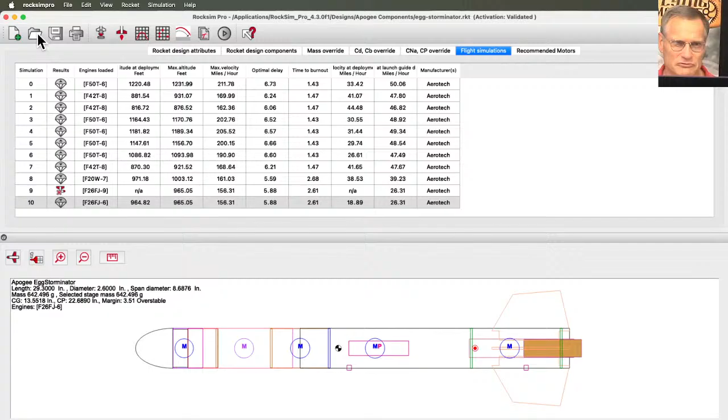I think I actually even tried, a few weeks ago, to create a glider. Let's see if I can find it. It's actually on my other computer. This is not my normal computer, this is the one I borrow to do RockSim. Let's see.

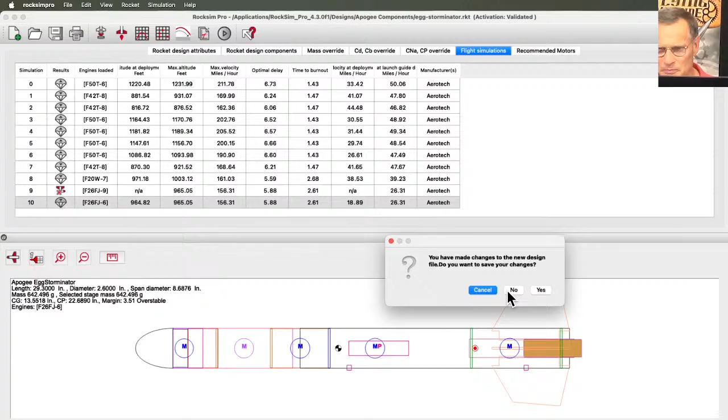Dynastar. Are you seeing my computer? Dynastar Snarky. Snarky has things that look like wings. So let's look at it in 3D right here. This is what it looks like, and it looks like it has wings. So does it have the potential to glide? That's the question.

Okay, so Curtis Howe, let me go to his question here. He says, I downsized the dark matter probe using the scale function. Not all the parts match up exactly to the small sizes. Is there a way to adjust standard sizes other than part by part?

And then Mark Sell's follow-up question is, does this apply to the gliding parachute you sell? And I can definitely tell you, Mark, on the gliding parachute, no, it doesn't. Definitely doesn't. Because in RockSim, as soon as the parachute comes out, it just follows the wind, and simulating a gliding parachute is beyond my knowledge.

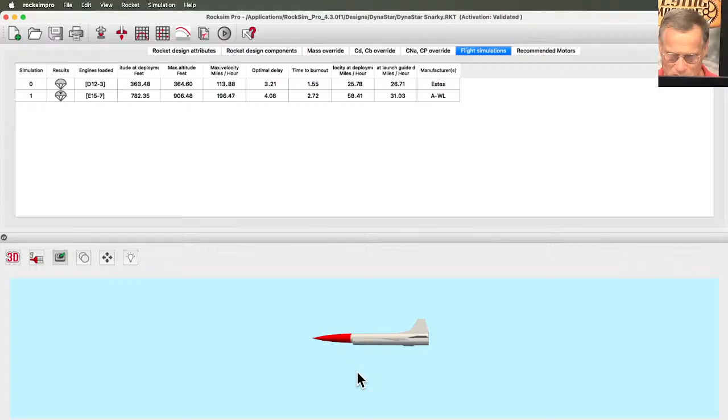I'll answer Curtis Howe's question because I think that's going to be easier. So he downsized the dark matter probe. I can downsize this too. Right now its diameter is 2.2 inches, and let's say you wanted to downsize it to a BT60.

So first you got to get a calculator, and I don't have a calculator in my dock, so I need to find a calculator app. Okay, so a BT60 is 1.637 inches, and this one right here is 2.217. So it's 2.217 divided by... I think I should have gone the other way.

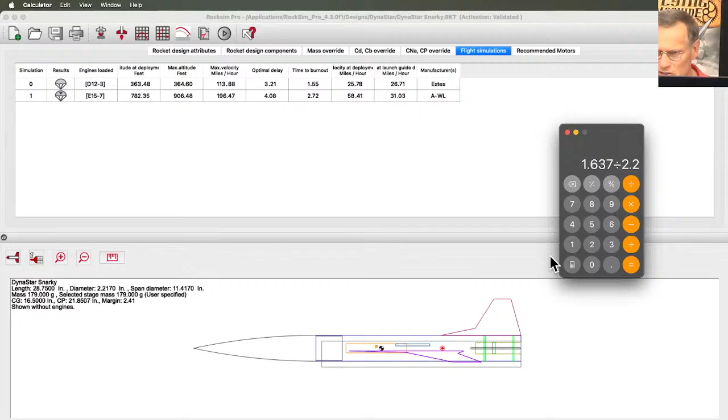I need to invert that, so it should be a smaller number. So: 1.637 divided by 2.217, looking at this number right here, equals... so we need to scale it down to 73.8%. I'm going to move this off to the side.

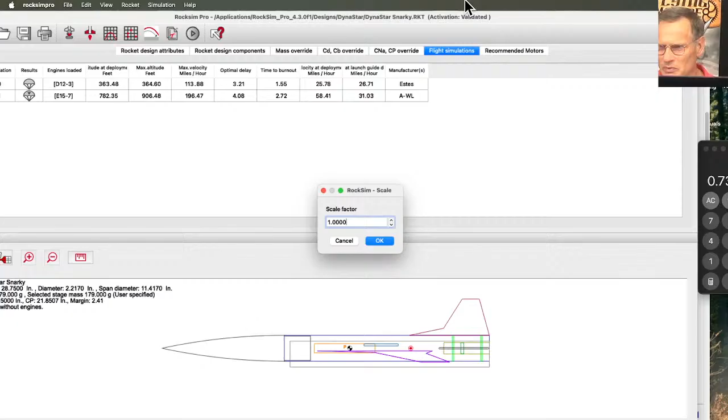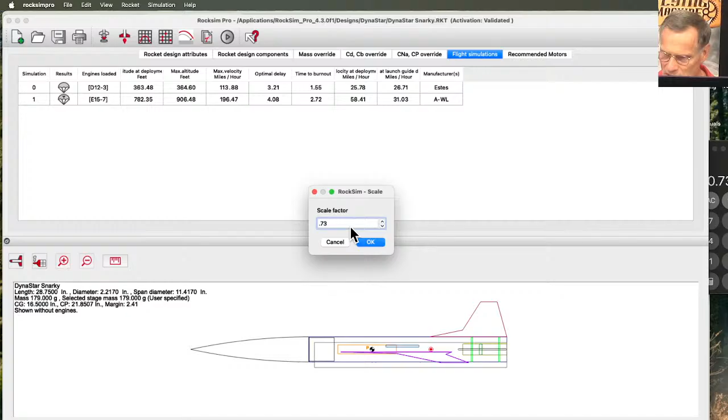So the scaling feature is: you go to Rocket, then Scale, and by Scale Factor, this is where it comes up. So I need to scale it to this number. Let's see what happens. Oh, it went away, I got to move that out of the way. Don't do that to me, come on. I have my screen resized and I didn't like it doing that. So: Rocket, Scale Factor, 0.7383521 — oh, it's only going to let me do that. Okay, so now it's scaled down to 1.63 inches, which is approximately a BT60. It looks the same, it's just everything's been scaled down.

Now the problem here, and this is what he's asking about, is: okay, so this is supposed to be a BT60 tube, but if we go and look at that tube, we go to Rocket Design Components, and it's highlighted so it'll be right here. If we open that up, now we got the correct outside diameter, but the inside diameter is wrong. So what should that inside diameter be?

So I'm going to go to the Apogee website, and I need an airframe tube, 41.6, and that is a BT60. It says Estes BT60 size. So if you look at the diameter, the inner diameter is 1.595 inches, where here the inside diameter is 1.6095. So it scaled down the outside correctly, but the inside also scaled it down, and it's not the same size on the inside as the outside, because a BT60's wall thickness would not be that thin — it's about the same as a BT70.

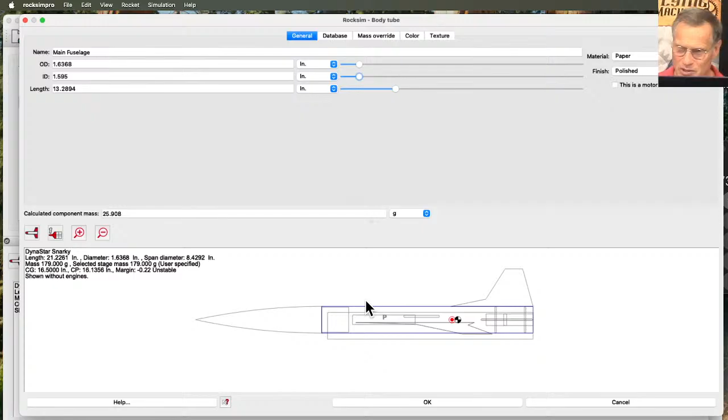So once you scale something down, you have to go through every part and say this has got to be 1.595 inches, and now it's truly a BT60. You have to do that for the nose cone. The worst is the tubes, because this one has an engine mount tube, centering rings - anything with two diameters won't scale down properly. Fins are usually okay, but launch lugs, centering rings, and couplers - you've got to go through them all one at a time.

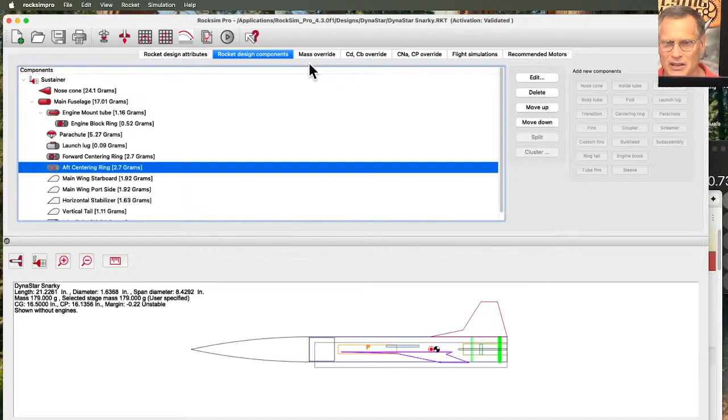Now the easy way to get around this is to just ignore all that, because really what we're interested in is the shape of the rocket and flying it. You can just quickly do a mass override at the end, and that accounts for all the differences between the two models.

Although once you scale things down, you don't know the weight until you actually build it. So you have to build it first and then scale it down. Yeah, that's the one problem with scaling.

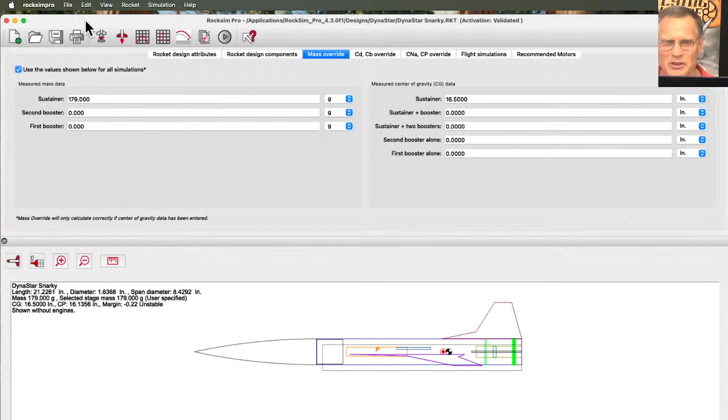Someday in the future, when AI is smart, this would be a task for AI. You scale it down and then tell the AI, okay, go find me the correct dimensions for all the parts on the Apogee website so that I can build my rocket easily. And that's how you do it.

So that answers that question from Curtis Howe. Alfred Indy says Michigan, hello - I think he's from Michigan, and he is saying hello.

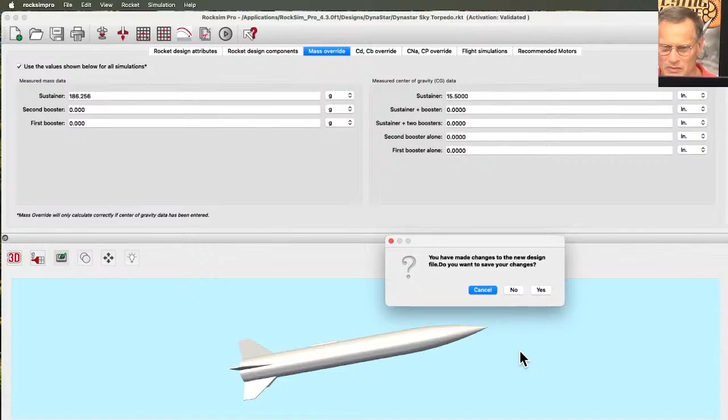Okay, so I just scaled that rocket down, so I need to reopen it. Let's see - Sky Torpedo, no, I'm going to reopen it. Snarky, open. No. Okay, so now we're back to the 2.217 inch diameter rocket.

Let's see if we can get it to somewhat glide. First, let's run a simulation. Let's just throw in a rocket motor, and I think I'll choose like a D12-5.

Okay, and flight events - let's say there's no event, so it's like a glider. The nose is going to stay on, the parachute's not going to come out. So if it doesn't glide, it's going to just come down like a rock.

Starting state, we're going to launch it almost straight up, and the launch guide azimuth - we're launching it towards the east. I'm just checking my settings here, my altitude. I do not know where that launch site is located, but that's okay.

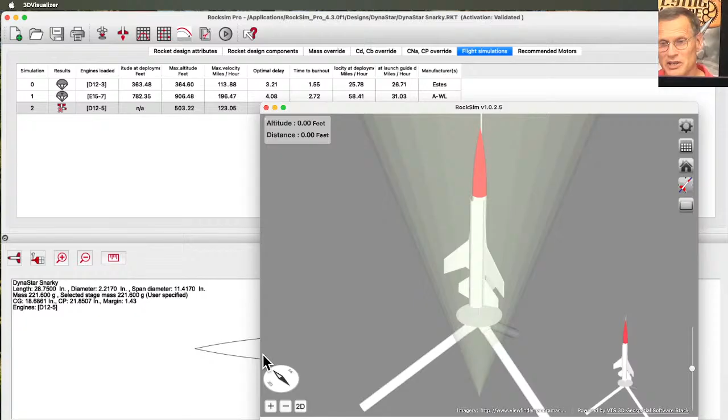Let's do the flight profile and click that button. We're going to get a RockSim Pro message, and you have to close it so that it will run the simulation. That's the downside of the free trial - you get ads, but that's all the ads you're going to see. You only get the ad one time whenever you run a simulation, so if you run a lot of simulations you'll see a lot of ads, but mostly just that one.

So this is what I was talking about in the launch visualizer. If you look at it, the background is gray. We can see the rocket sitting on the pad, and we can see the sky and the horizon, but I have no depth perception of where this rocket is.

But let me leave the weathercocking cone on - it's giving me a little bit of information. What I do know is this rocket's going to be in the air for 25 seconds. So let's take a look at it. It's going up, and it's in the weathercocking cone, so it's doing fine.

All right, so now it's kind of flopping around. Okay, see, I can call this gliding - it's upside down, but it's gliding. It's gliding backwards. And we're getting down close to the ground. Let's see if I can stop it right there.

Let's zoom out and get the lay of the land here. So we can see that trajectory, and it's not your typical trajectory. Let me turn off the weathercocking cone now, and let's turn off the smoke.

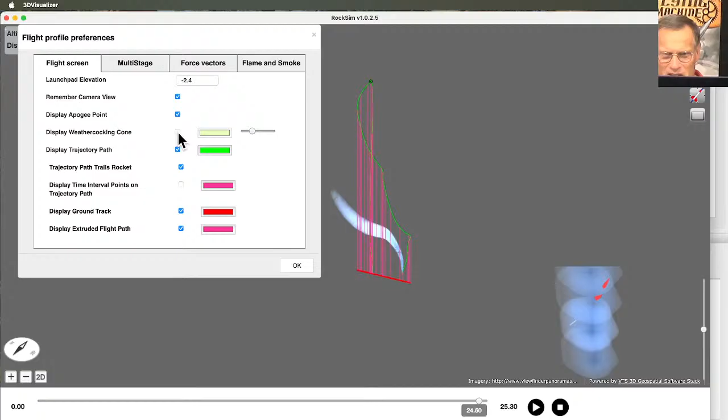Okay, and turned off the tracking smoke. So the rocket's going up, and now it's coming down. You can see its orientation here as it's coming down. It's not gliding the way we would like it to glide, but that is technically a glide.

Let's see if we can look at it from straight down. Looking at it straight down, can't tell much from that angle. But the liftoff point was right here. It went up and zoomed around, but it kind of just followed the trajectory down to the ground.

Okay, so now technically it is gliding. Let's see if we can get it gliding nose first. So let's put some nose weight in this rocket, because basically it's close. So this is going to be interesting. Let's see what happens.

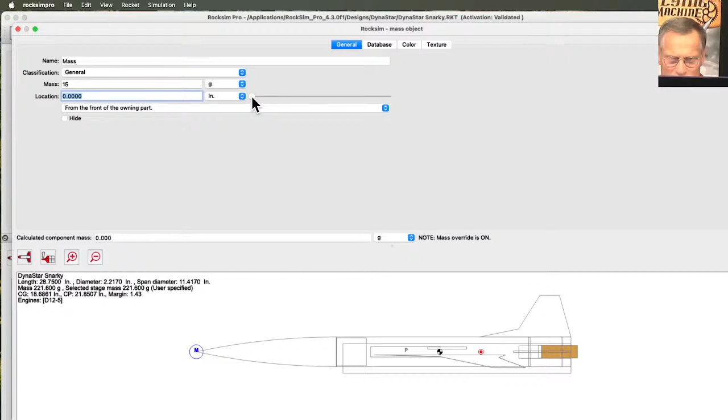So let's put some nose weight in there. I'm selecting the nose cone. I'm going to come over here to mass object. This is the database of all the mass objects, but I don't really care about anything, I just want some mass. Let's throw in 15 grams. And so right now that mass is right there. I'm just going to move it inside the rocket a little bit. And we'll call it good.

And now let's launch it again. So this is how you go ahead and design things. You make your first flight, see what it does, then you come back, make some changes, see what it does. So that's kind of what we're doing here. It's going to be in the air about the same amount of time.

Let's launch it. So it launches, it's going up. I can still see it's going up right here. Now it's starting to come back down. Okay, so now we're going down. And it's a better glide than before. Before it was different.

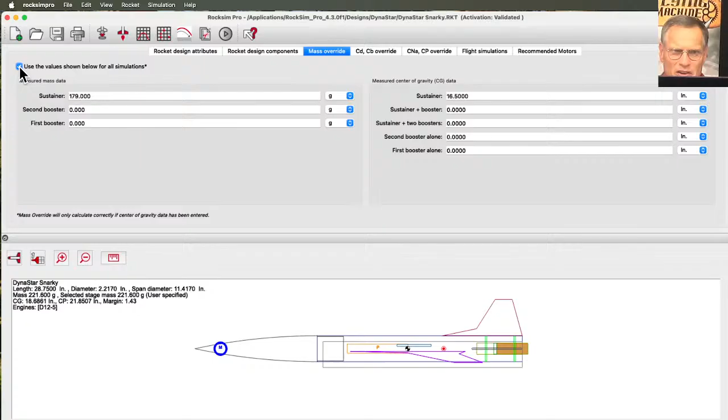Now, let's go back to the design components, take that mass and delete it. Basically, we have to start over because we had screwed up, because we had a fixed mass. I'm going to say yes. So we're going to launch it again. If you click on this one here, it'll explain this mass problem that we're talking about like right now.

Mark Sell writes, can you adjust the CG so that it is closer to the CP to help improve glide? And that is exactly what I'm trying to do right now, Mark, adjusting the CP and the CG. But it's not as easy as it seems.

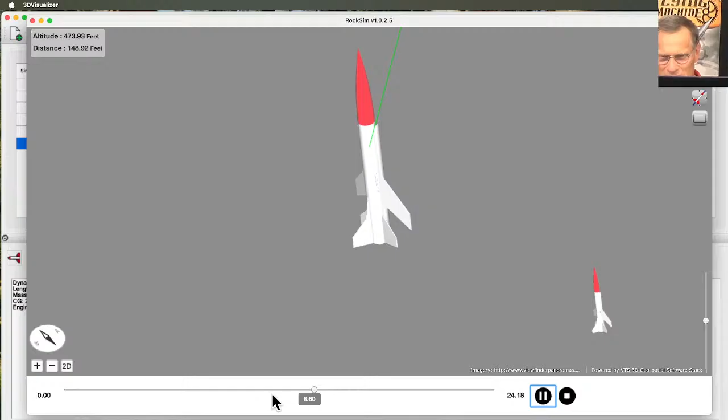Okay, so rocket is kind of doing what it did before. It's flopping around. It flipped over, almost wanted to flip over. It's kind of wobbling back and forth. And just about down. Okay, so let me zoom out, see what it looks like. Okay, so this one is definitely a longer glide.

Do you see that? So the liftoff point was right here. It went up, kind of flipped over, and then it was kind of backsliding right here. So now I can select, I know this one was different from this one. So if I select both of them and hit the flight profile button, we can compare two flights at the same time.

Okay, so right now there's two rockets right here. See, one just took off and went in a different direction. And I want to pause it when it gets down to here. And then I want to look at it from this perspective. So one rocket landed here, one landed right here. So the one we were zoomed in on was this one. They both stayed in the same plane, it's just they have different trajectories.

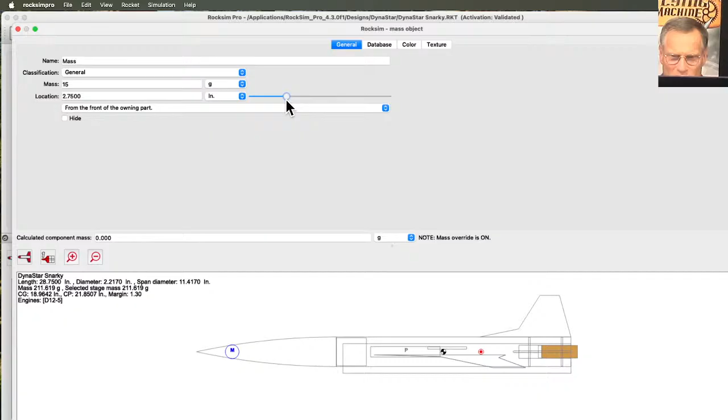Okay, so now we're going to take this one here and I'm going to add that 15 grams of nose weight. So I'm doing what I did before. I'm just moving that nose weight here. And I click OK. And then we're going to launch it again, same as before.

Flight profile. And we're going to launch it.

Chris's Rocketry and More is here, and he says, hello, I made it.

All right, so there's the rocket on the ground. We launch it, it's going up. This one's staying in the air a little bit longer. I want it to nose over. It still wants to fly backwards.

Anyway, so that was part A. Part B is typically on gliders, you take the fins and you cant them so that it will pull out of a dive. We can't even get ours into a dive right now. So canting the fins, I don't know what it's going to do.

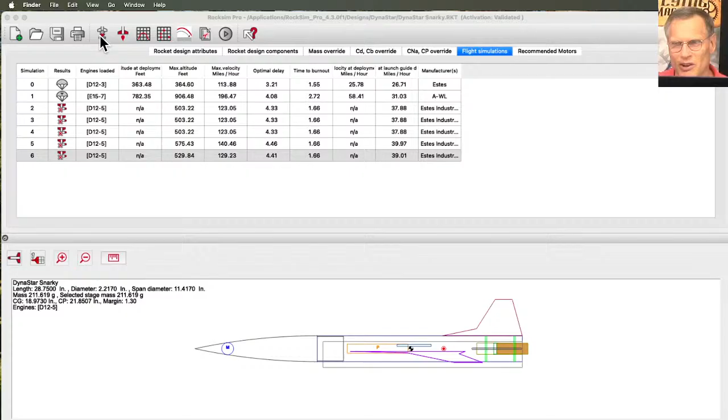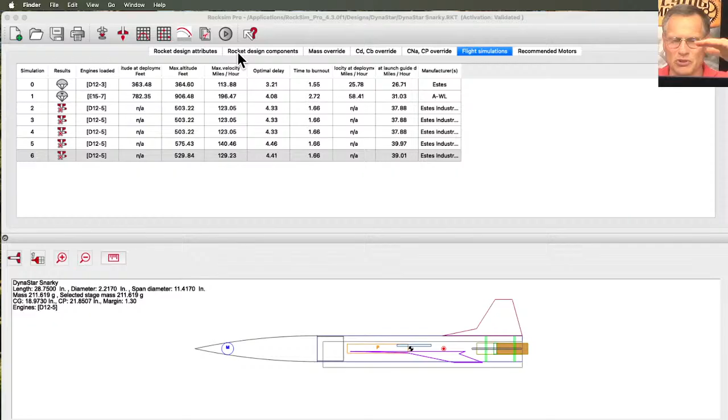So here's the part where we proved it can glide, but now we want to start tweaking things, and here's where it gets hard, because I noticed this bug a couple weeks ago, and we haven't fixed it, so I know it's still broken. One of the new features in RockSim Pro is you can adjust the fins at different times in the flight. So we got these back wings here on our glider.

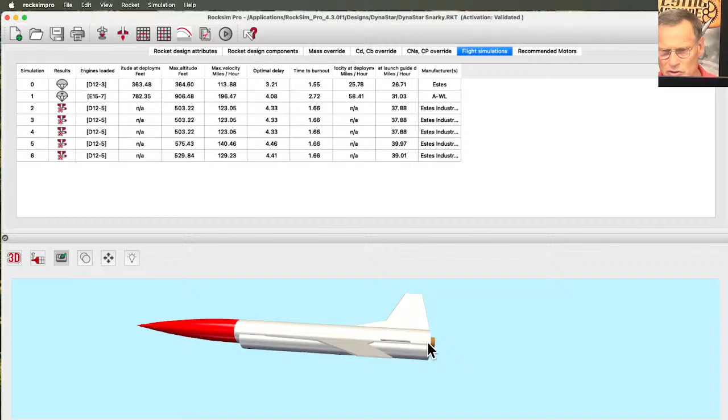So right now, those elevators are at 0 degrees angle of attack. So to make this thing pull out of a dive, we want to pitch them down so the tip is a little bit down relative to the wing. And that should cause it to create a downward force on the back, causing the nose cone to rise up. But this is where it gets really hard.

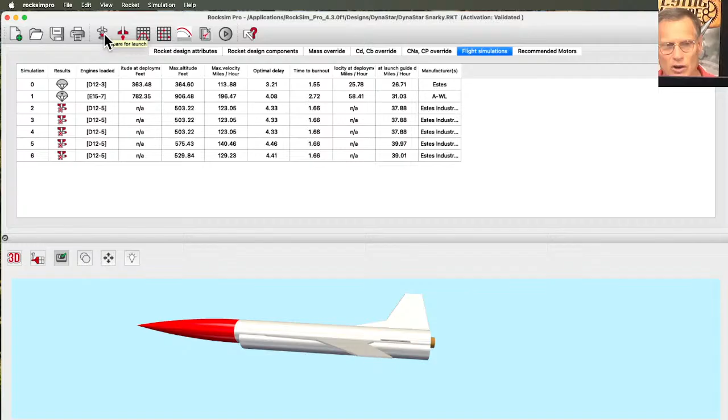So I can change those fins. We have the horizontal stabilizer right here. And if I go and edit that, and go to the radial position tab, I'm editing this rectangle right here, I can change the fin cant angle. See if I change it, now I got a fin cant of 12.5 degrees.

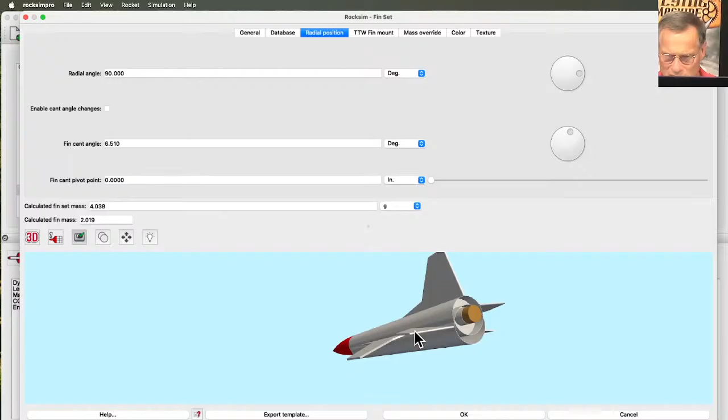The problem is I have two fins on my rocket, and they're on opposite sides. So when I cant one 6.5 degrees, it cants the other one in the opposite direction 6.5 degrees. So if I look at this in 3D, you can definitely see this one's canted up, and on this side we're canted down. So canting it down is what we want to do on both of them to cause it to pull out of a dive.

So what I would have to do in this case is take these two fins and split them apart. I'm going to cancel out of here. It's asking me to save the changes, I'm going to say no. So now I went back to the original, and I want to take this horizontal stabilizer and split it into two pieces.

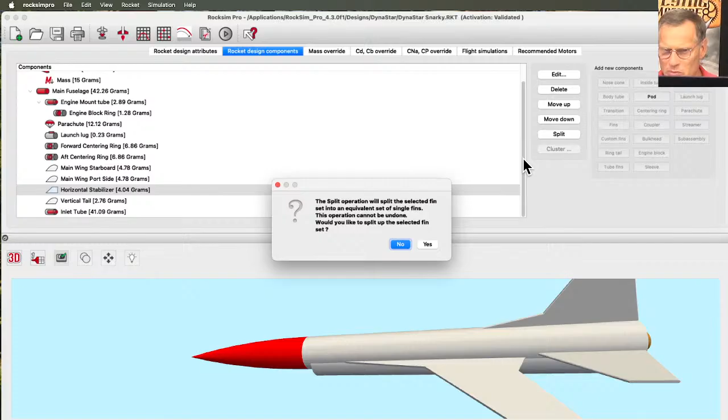So right now they're considered as one, and I'm going to split them into two separate items. I'm going to say yes right there. So now we have two horizontal stabilizers, this one on this side, and then that one on the opposite side of the aircraft.

See if I can zoom out a little bit. So this one is on the port side or starboard side, and this one is on the port side. So now if I edit these, let me recenter this and zoom in. Oh, what happened?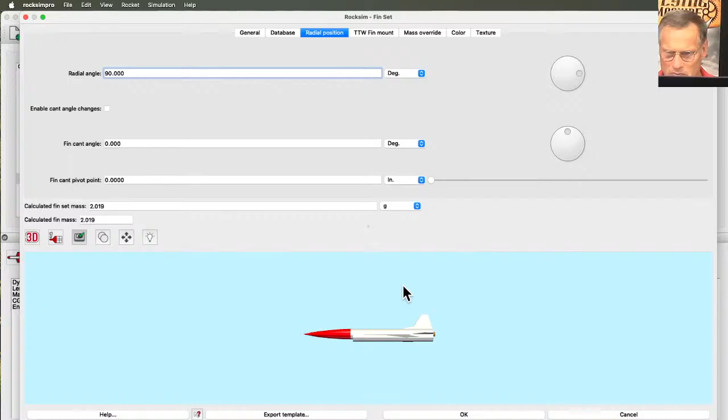Okay, so if I go to radial position, and I'm not sure if I got the starboard or port, we'll figure this out in just a second. Go to radial position. Okay, so we must have the starboard because this one's not doing anything. So I'm going to call this one the starboard. Starboard is at the right side.

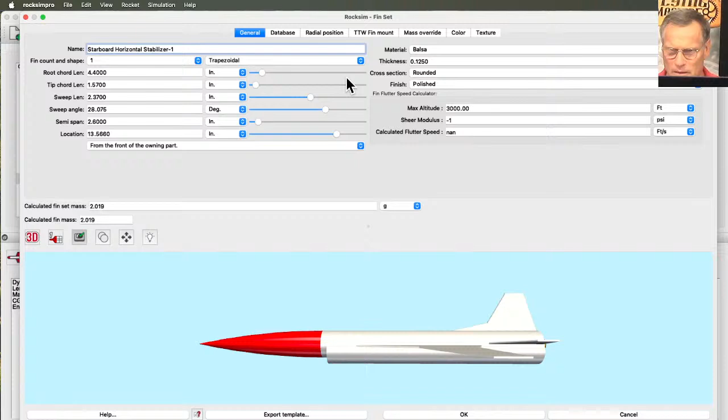And I want to give it a fin cant angle, I don't know, let's call it 5 degrees. Click. Okay, if I rotate this around, that's pretty big. Let's go 2.5 degrees, half of that. Did you see it move? Okay, so that horizontal tail is now angled down. So now we got to do the other one.

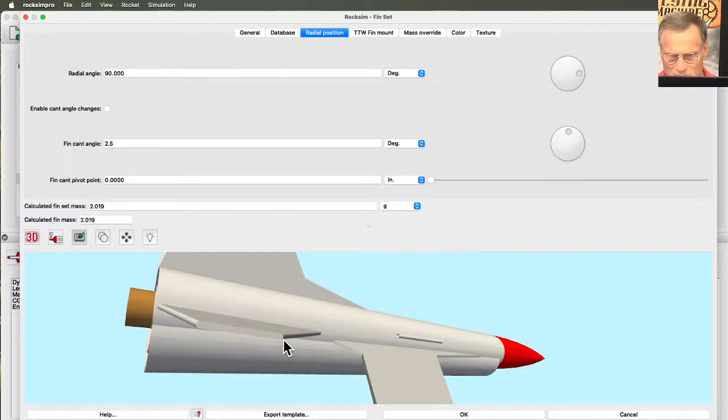So this one, now this is our starboard or port. And if we go to radial position, if I say fin cant angle 2.5 degrees, you'll notice that it angled it up. We need to angle it down. So I got to make that a negative 2.5 degrees.

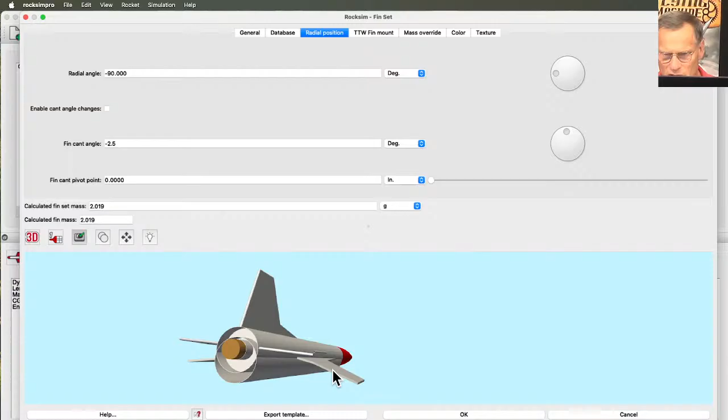So now it's angled down. And if I spin it around, it should look like the other one. If I look at it from the back, it does look like they're both at 2.5 degrees. So here's where the bug is. So in 3D, it looks correct.

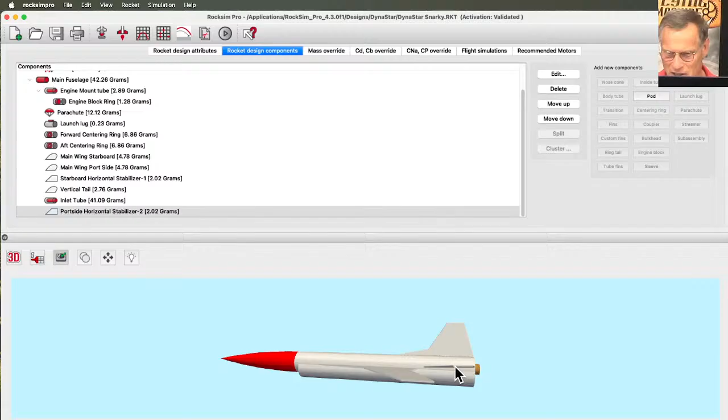But if you go to 2D, it reversed it. So remember, we angled them down, and now they're angled up. And I don't know which one is correct. Actually, I don't know if we'll be able to figure that out or not. So in 3D, they're angled down. In 2D, they're angled up, which is a bug. Should be like that.

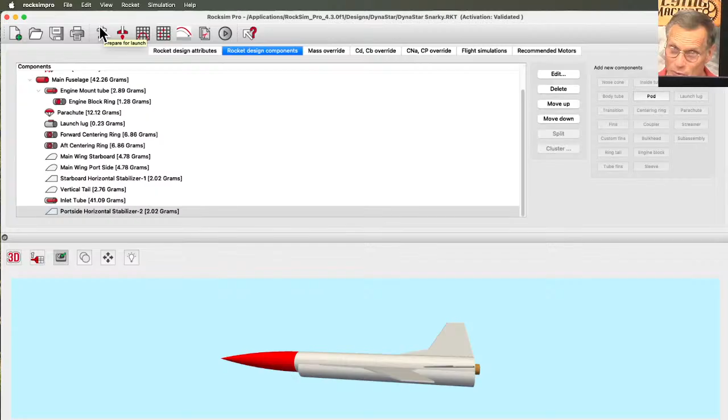All right, so now let's launch it and see what happens. I don't know what's going to happen. We already know there's a bug in there. I don't know how the bug is going to affect the flight. Then we click flight profile and see what it does.

Mark Sell says, I did not know you could do overlapping simulations. Good to know. Yeah Mark, that's one of the coolest features. That's one of the new features that came out earlier this year, and it's only in RockSim Pro. It doesn't do it in RockSim.

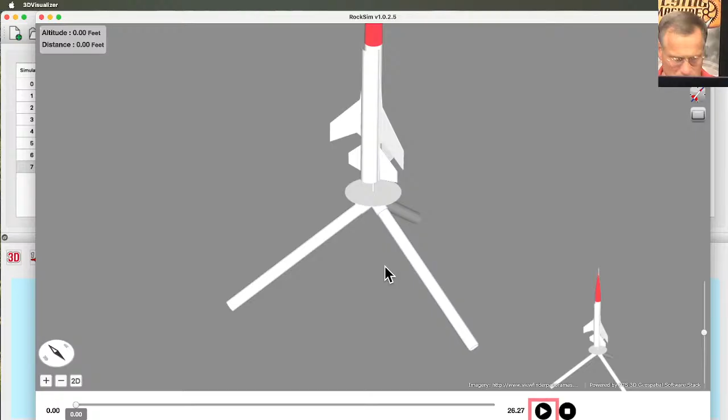Okay, so I want to look at this rocket on the pad. It does look like it's angled down compared to this wing right here. But notice, 26 seconds. So let me go look at that view. I went to that view and now I can't even see the rocket. Let's launch it. Yep, and the rocket went out of sight.

Okay, so it's doing something. It almost looks like the same as before. So let me turn off this one. And let's click OK.

All right, so now let's compare it, like we were just talking about, compare the two simulations. And we hit launch. And we've got to wait for another ad. Close it.

Okay, so again, there's two rockets sitting on the pad here. And let's launch. Okay, you can see one split off. You can see they're kind of flying in tandem, but they are a little different.

Yeah, it's kind of like... that's interesting, that looks cool. Kind of looks like a skier. Yeah, the trajectory was about the same. So canting the fins affected it a little bit. It's like it affected it going up more than it affected it coming down. Interesting.

Yeah, I'm sorry, again, sorry for the gray background. It should be a map of the planet, and that gives you perspective on what it's doing. But I have no reference right now. Yeah, so I'm sorry for that.

Mark Sell says it was gliding inverted, so canting inverted should work? And I said, like, I don't know, there's a bug. This is really hard because we're trying to calculate all the forces on all the individual parts of the rocket. And yeah, it's hard.

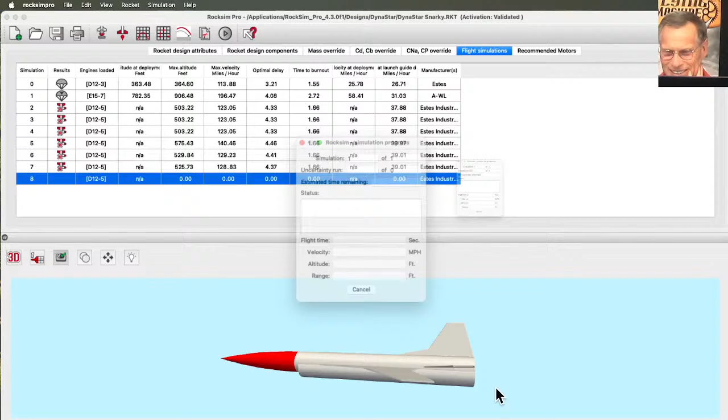Oh, I didn't want it to do that. Okay, so our rocket is right there again. Oh, this one's 22 seconds, so it's 4 seconds different. So it definitely changed something.

Let's launch it and see what happens. It still looks like it's going straight up. You can see north is kind of like at the bottom right corner. And yeah, it definitely did something different that time.

So yeah, it's coming up at us. Yeah, now it's falling down, but it's doing weird things. Yeah, it's like, I don't think it'll ever be perfect, but it's fun to play with.

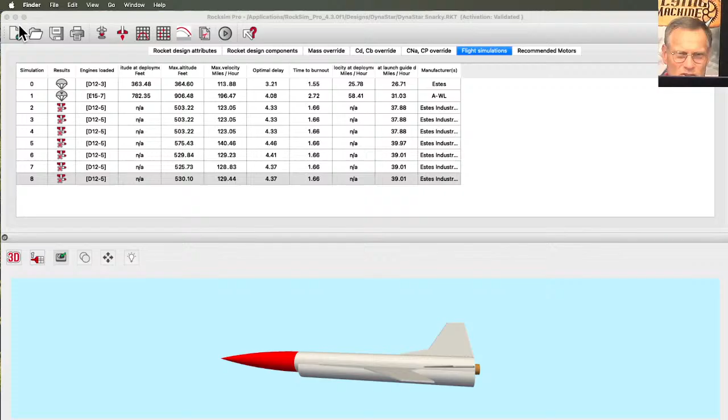One of the things that... let's go to a normal rocket. I'll talk about something different. Let's go to a Dynastar Orion. And save my changes? No. Okay, so here's a Dynastar Orion rocket. What is that? I don't like that, let's try a different rocket. This one has some remnants of something going on.

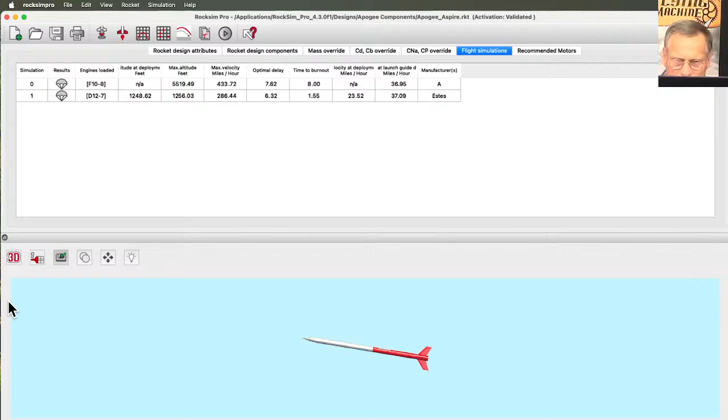Apogee Aspire. Save changes? No. Okay, so here's an Apogee Aspire. And let's put in an F10. Here's an Apogee F10-8. Click OK.

So streamer, let's leave it as no event. I want it to come streaming back down. Starting state, let's go up vertically. And again, we set the wind from the north at 8 miles an hour. And let's see the flight profile of this.

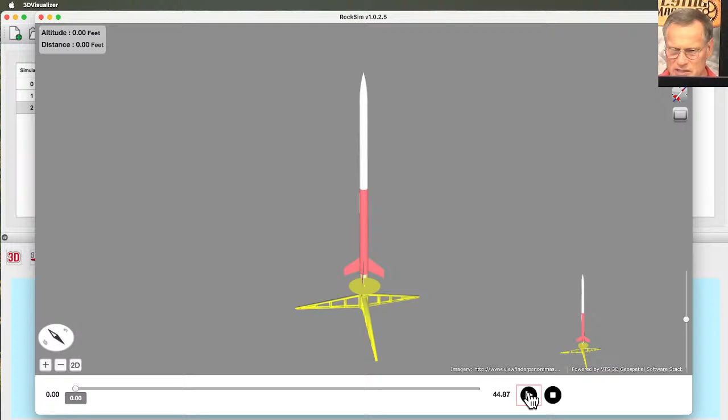Okay, so this one's going to be in the air for 44 seconds. I just want to see the up part. And we're at 2,000 feet, 3,000 feet, 4,000 feet, getting close to apogee, 5,000 feet, 5,050 something feet. All right, so now it's going to come screaming down into the ground, and it's hit the ground.

At a negative 22 feet. It dug a hole 22 feet deep. Let's see the trajectory.

Okay, so let's swing the north around this way. Okay, so remember we have wind coming out of the north. So here was our launch point. No, here was the launch point. The wind is coming this direction, kind of towards the bottom. So when it lifted off, it weathercocked into the wind, which is what we expect. Then it reached its apogee, and then it just came screaming into the ground.

What I wanted to show was RockSim Pro allows you to do uncertainties. So an uncertainty is like, I don't know if my fins are on straight. I'm uncertain about that, and you can say, well, what would happen if they are not on straight? Those are called the uncertainties. So these are all the things that you can be uncertain about: the mass, its moment of inertia, the center of gravity, aerodynamics.

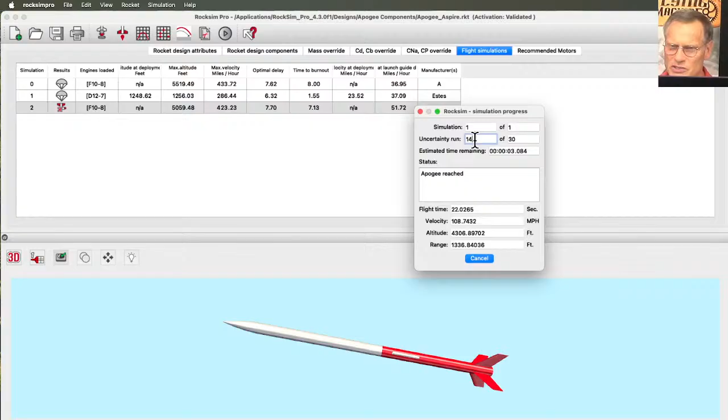And then let's say, let's run this simulation 30 times. And then hit launch. And then after our ad, we will close that, and it's going to run it. So now it's running the simulations, and you can see how fast it's flying through them. And this is because we're not running a streamer on it.

So we're just going up and coming down. And you notice the results are exactly the same, but here's where it's different. I can go to this landing, plot landing points. Since we ran this 30 times, there's 30 different impact points. And because of the uncertainty, it's kind of doing a random number generator. It's varying the wind direction and the wind speed, plus the launch rod angle, so it's how far it is from vertical, and then also what direction it's pointed. So there's actually 4 things that we're uncertain about.

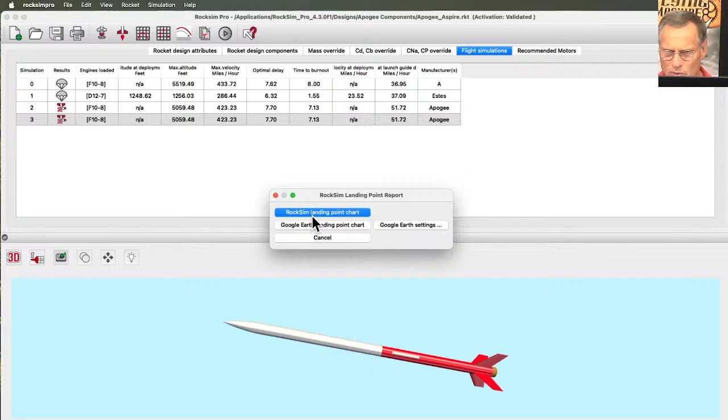Again, our nominal point is straight up, but it's 1,000 feet away. Wow. Basically, this thing arced over and it went 1,000 feet. Remember, we're going over 5,000 feet high, so we're almost a mile high, and it's going to land 1,000 feet away because of the wind. And so all these landing points are scattered all over.

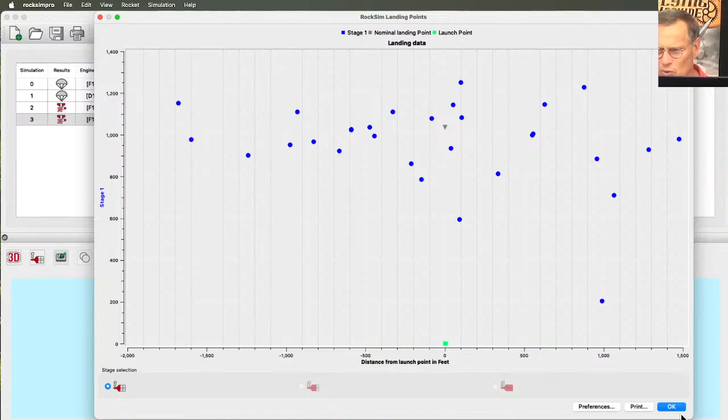So this could be the landing zone where we'd expect our rocket to land. This is the RockSim landing points chart, and if you go back to that same one, there's also a Google Earth landing point chart.

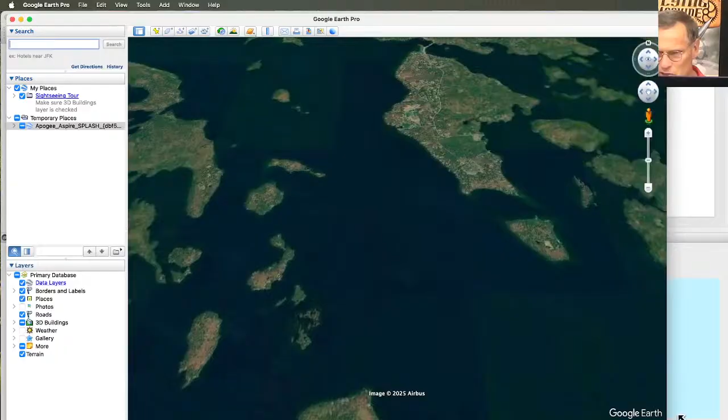This is what I was playing with earlier today, since this isn't my computer, so I had to load Google Earth onto it. It was hard to find online, but I found it, so they're still making it, which is really good. It's kind of like the launch visualizer, except better because it shows outlines of states, cities, and roads.

It made a splash pattern on Google Earth, over here. I want to expand it and turn on all the points. Here's the launch point, and I'm going to zoom in by double clicking here. Holy cow, our launch point is in the water!

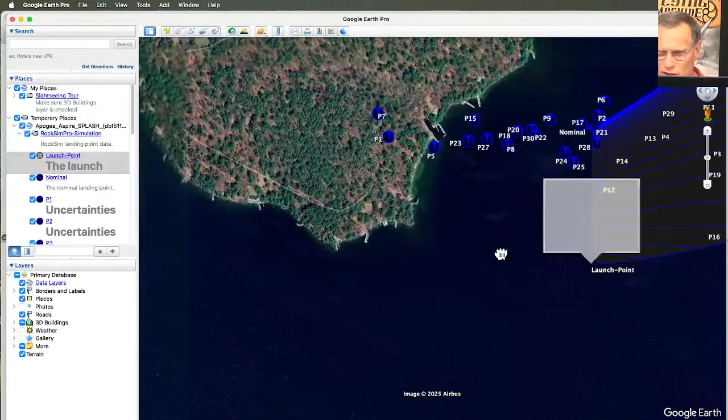Didn't know that. So we must have been on a barge or something. Our launch point was right here in the water, from some kind of watercraft. So we can see the trajectory.

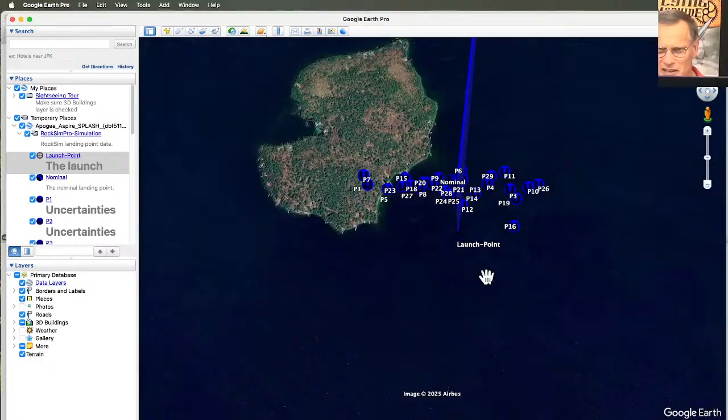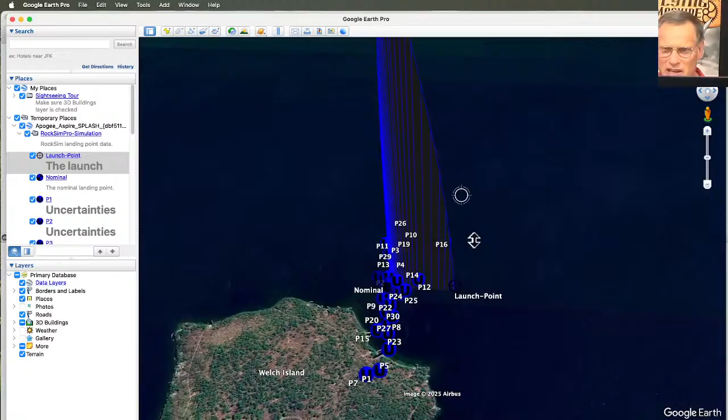This is kind of like what the launch visualizer does, except it's not animated. So we can't see how the rocket is acting like we did earlier with the snarky rocket, where you saw it flopping around like this.

My camera seems off. There we go, put it in front of my face.

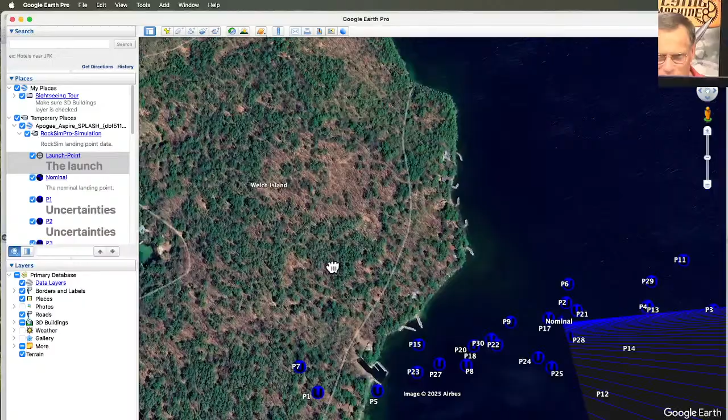So these are all the uncertainty landing points. There's no good place to launch a rocket from this little island. But if you click on these landing points, it will bring up what the error was. This is the wind error first.

At 0 feet above sea level, we had an error of 3.23. So instead of being at 8 miles an hour, it was at 9.9 miles an hour. No wait, that was the direction. So we have altitude, direction, and velocity. Right here it's blowing pretty strong, because we said 8 miles an hour and it's showing 17. That's a big difference.

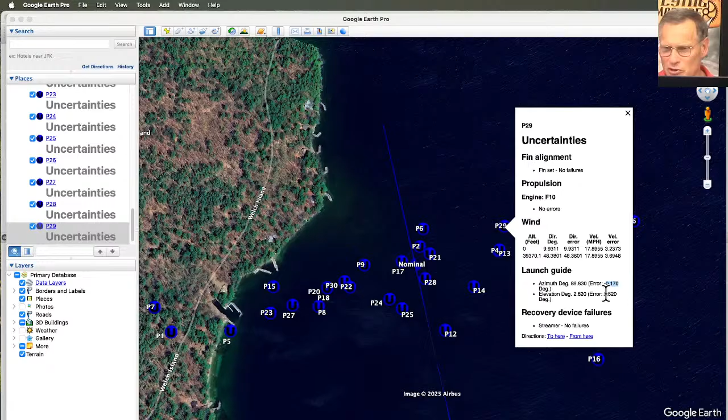But we also have the azimuth error. Instead of being straight up at 90 degrees, this one is just a little bit off of straight, minus 0.17 degrees azimuth, which is just a little to the north-west of north. Our elevation is our degrees from vertical, and this was 2.6 degrees from vertical, and it landed there.

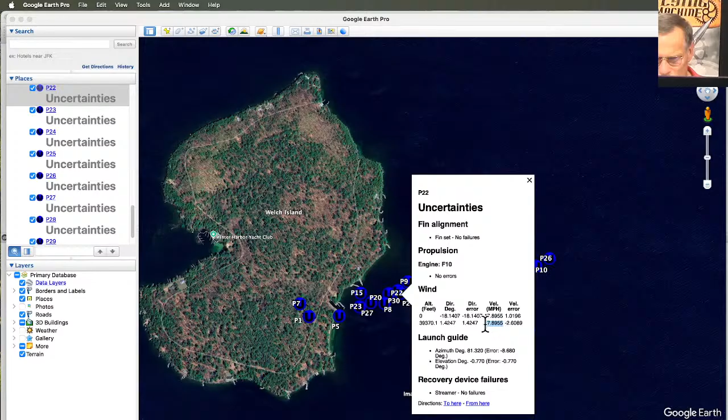If you click on a different one, you can see different errors. Again, our velocity is so high here, so there must be some conversion error, because it shouldn't be that far off. These are all like 7 miles an hour. That's pretty cool.

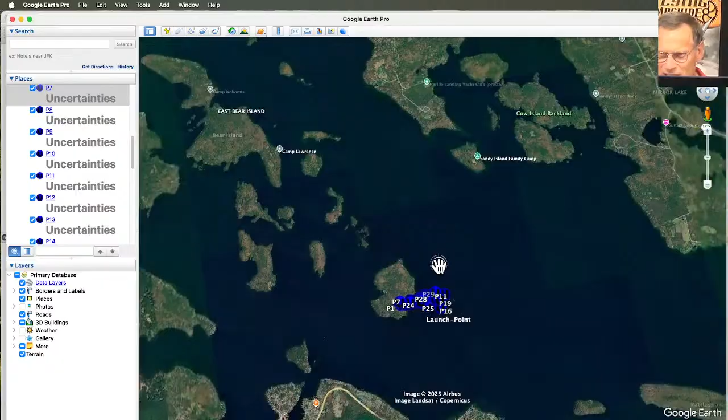Yeah, it's not a good launch site. And that's in Vermont or New Hampshire.

So what I found out was there's a website called earth.google, www.earth.google.com, and you get this. It was really hard to find the desktop application because they have the Earth version in a browser. See, I got the world upside down.

I was wondering if you don't have the Google Earth application, does this web browser version work? I found out that it does. But what you have to do is, when RockSim runs these, it creates a file on your computer, this file right here. Let's see if I can see the full name. Yeah, it's a KML file, which I think stands for Keyhole Markup Language or something like that. It's specifically for Google Earth to draw on Google Earth.

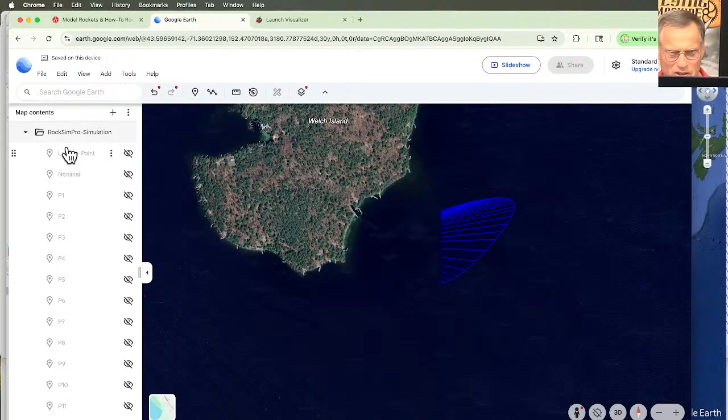It's showing it, but it's only showing the nominal trajectory. Our launch point is off of some boat right there. But if I go to this file right here, I can turn on all these other points. The thing I haven't figured out is how to turn them all on at the same time without manually clicking on each one.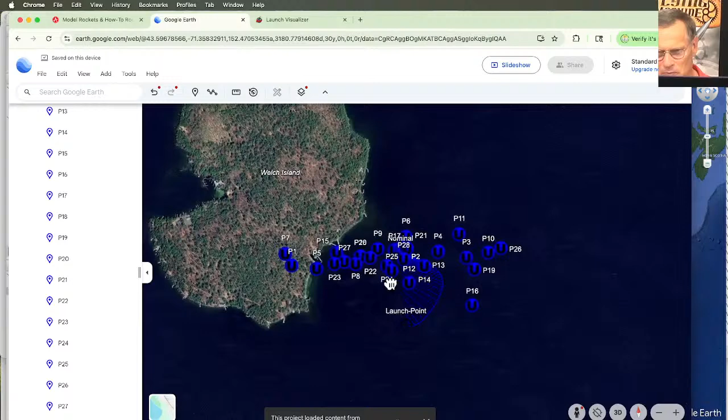So what I'm saying is you can use the desktop app, or you can use the web version of Google Earth to see these maps. I think it's just more convenient with the desktop app. And then when you click on one, it brings up all the errors, the uncertainty errors, so you can see what caused the rocket to land on that specific point.

So I clicked on point P27, which is right there. That was what I was playing with today. It's all the same. It's kind of cool that if you click on it, it will just fly right there.

Alfred Indy says, my hawk goes through the same spastic movements that your simulation makes with the wind, until the wind straightens it out. Yeah.

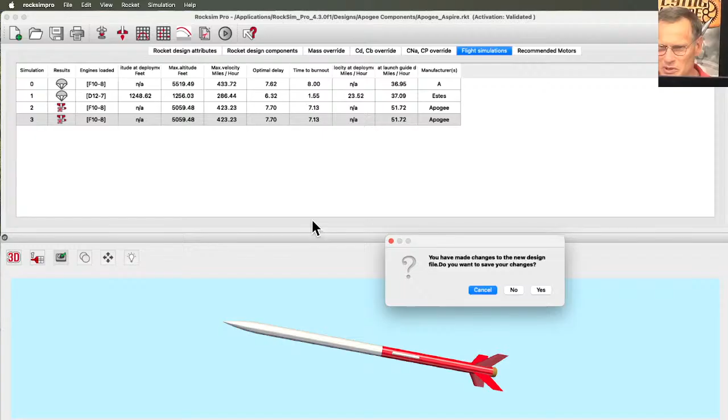Very cool. Don't save all of these. When we quit RockSim, let's see if it happens. I'm going to go to RockSim Pro, quit RockSim Pro, and say no. It's supposed to clear all these out when you quit.

Interesting, because I've run a lot more simulations than that. You don't want to be cluttering up your computer with a lot of temporary files. Let's see if I restart RockSim Pro whether they go away. Oh, they did. Did you see that? They all went away.

The thing that's not going to go away are those KML files. Once it exports them out, they're out there. They're not big, 149K, not huge - you'd have to get thousands of them before you'd probably have a big problem. But I'm going to delete them now. Just go File, Move to Trash. And then this new one was a backup one, I can delete that too. Move to Trash.

So it is right, RockSim does empty out the trash once you're done doing your simulations.